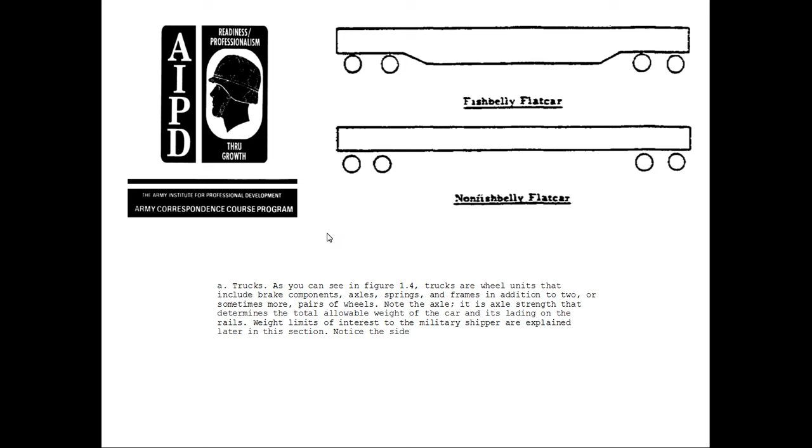Note that the axle strength determines the total allowable weight of the flat car and lading on the rails. Weight limits are of interest to military shippers, and are explained later in this section.

Notice on the side: the truck, the deck, the underframe, the brake wheel, stake pockets, body bolster, and underframe. The trucks include brake components, the axle, spring, frames, in addition to two or sometimes more pairs of wheels.

Notice the axle; its strength determines the total allowable weight of the car and lading on the rails. Weight limits are of interest to military shippers, explained later in this section. Figure 1-1 shows a typical flat car, Figure 1-2 a flat car disassembled, and Figure 1-3 a typical truck bearing and bolster.

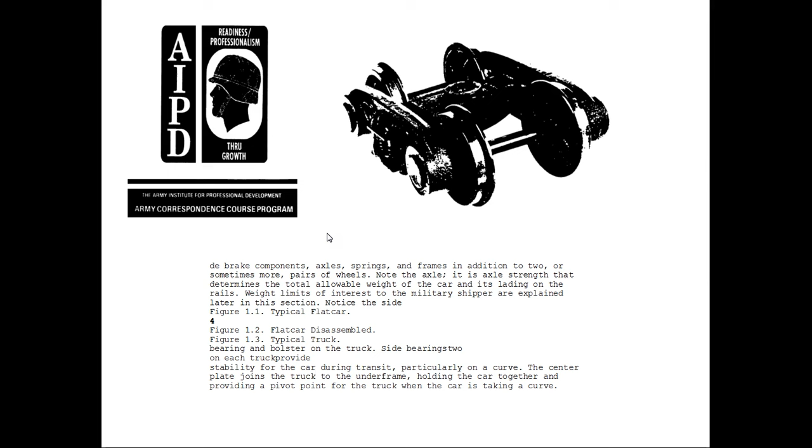The underframe. The framework of the underframe is shown in Figure 1-2. It is the foundation of the flat car, receiving buffing and pulling stress, and carries the weight of the deck and lading.

Stake pockets are attached to the side sills to support stakes and temporary sides above the deck. The transverse member at each end, called the body bolster, contains a projection that fits into the center, shown in Figure 1-4.

Going from the top, 12 o'clock clockwise: side bearing, axle, center plate, brake lever, brake hanger, brake shoe, wheel, rail, brake beam, brake pin, bottom connecting rod, journal, side frame, spring plank, coil spring, and bolster.

In the bottom picture of the underframe, from 12 o'clock clockwise: center sill, cross bearer, body bolster, side bearings, draft gear pocket, end sill, diagonal braces, stringer support, side sills, and stake pocket.

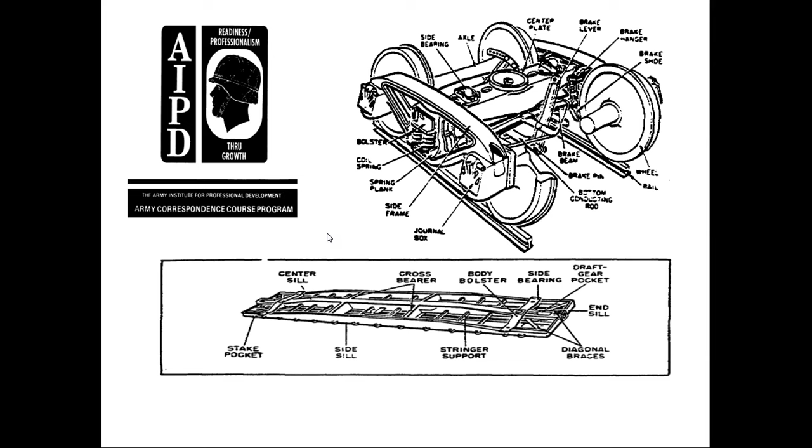C. The deck: the platform flat car load rests on the deck, normally constructed of tongue and groove wood plank for a solid fit. The deck is secured to the underframe. Figures 1-1 and 1-2 illustrate the deck clearly.

D. The brake wheel, located on one end of each car, is the brake wheel that operates the handbrake.

Although the typical flat car in Figure 1-1 shows the brake wheel under the side of the deck, the more common position is upright, as sketched, extending above the level of the deck. The brake wheel is used to secure and hold the car when parked, keeping it from moving.

In some yard or road operations, the handbrake is used to slow down and stop the car when it is in motion. The brake wheel can be lowered or removed to make loading the flat car easier. A loading rule specifically requires clearance around the brake wheel to ensure it remains accessible at all times. More about clearance is given with the car load rules, discussed in Section 2.

1-4, the truck center. Since loading rules are expressed in terms of the location of the truck center, it is important to understand what this term means: simply, the truck center is the center of the truck, regardless of the number of wheels. How to find the center is discussed in the following subparagraphs.

For a four-wheel truck, the center of the bolster is the center of the truck. A chalk mark placed on the side directly above that point will help you find the spot on the loading flat car. The sketch shows how to mark the center of the four-wheel truck.

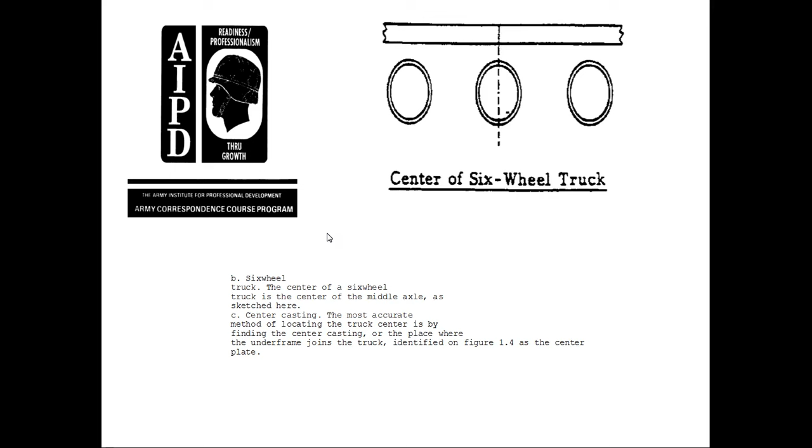For a six-wheel truck, the center is the center of the middle axle, as shown in the sketch here. The center casting method accurately locates the truck center by finding the center casting, the point where the underframe joins the truck, identified in Figure 1-4 as the center plate.

1-5, weight limits. Although there is no standard dimension for commercial cars, the described flat cars are commonly used on railroads in the United States. The Official Railway Equipment Register should be consulted for the description of specific cars to be used.

Information stenciled on flat cars gives the military shipper three essential data items about the car: capacity, load limit, and light weight.

Capacity is given in short tons, and platform dimensions in feet, approximately. A 40 short-ton car has a length of 40 feet with a 9-foot width. A 50 short-ton car has a length of 45 feet with a 9-foot width.

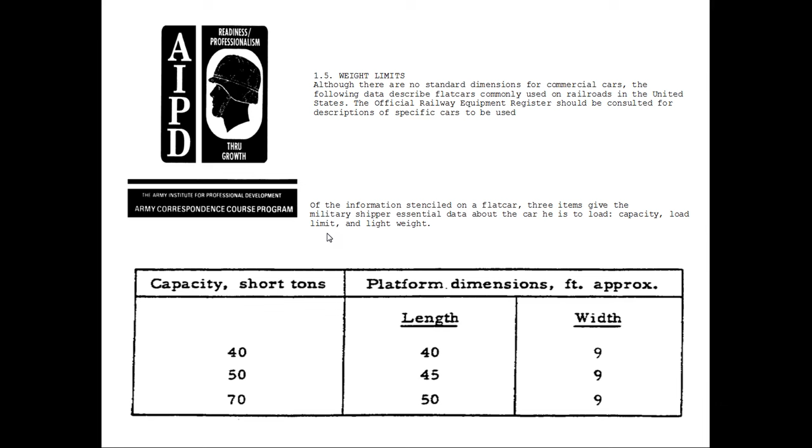They're all 40, 50, and 70 tons, 9 feet wide. The 70 ton is 50 foot in length approximately.

Capacity: suppose your car is marked at a capacity of 100,000 pounds. What does that mean to you? Simply, this is the capacity marking on the car, the basis of the tonnage class. Capacity in this instance, nominal, is expressed in multiple units of 1,000 pounds based on the weight of the car itself and total allowable weight of the car and load.

Capacity 100,000 means that the car is a 50-ton class. Capacity does not tell you how heavy your load can be, any more than the nominal rating of a 5-ton truck means a 10,000 pound limit on the payload. As you may know, a so-called 5-ton truck can carry more than 5 tons on the highway.

Load limit: the abbreviation load limit, LD LMT, with a number after it expressed, is the maximum load the car is designed to carry without endangering the car or load.

The notation LD LMT 118,600 pounds on a flat car means the car can carry a load up to 118,600 pounds. The load limit plus the weight of the car, described in subparagraph 1.5c as the lightweight, equals the total allowable weight on the rails mentioned in paragraph 1.3, dependent on axle strength.

C. Light weight: the abbreviation lightweight, LTWT, with a number of pounds, refers to the weight of the car itself. The lightweight is measured without a load, clean, standing still on the scales, and uncoupled at each end.

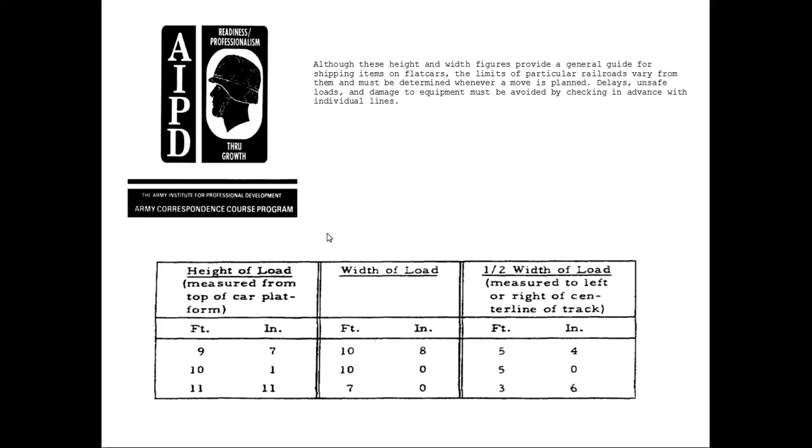At a height of 10 foot 1 inch, the load can carry a width of 10 foot, where half the width of the load is 5 foot. At a height of 11 foot 11 inches, the width load is 7 feet, where the half width load, measured from the centerline of the track, is 3 foot 6 inches.

1.7, vehicle carrying capacity. Note that we're trying to answer how many 5-ton trucks can fit on a flat car. Basically, that's what you must know: dimensions and weight of the 5-ton cargo truck, including any cargo, the length and width of the flat car deck, and the load limit of the flat car. Note that all 5-ton cargo trucks are also modeled differently in size, weight, and dimension.

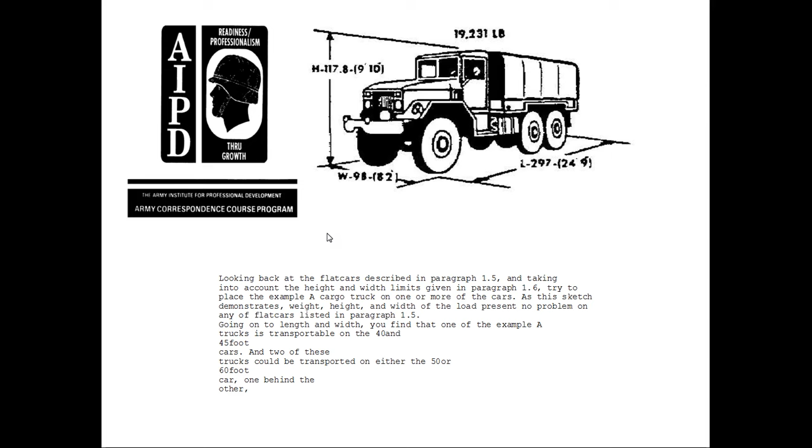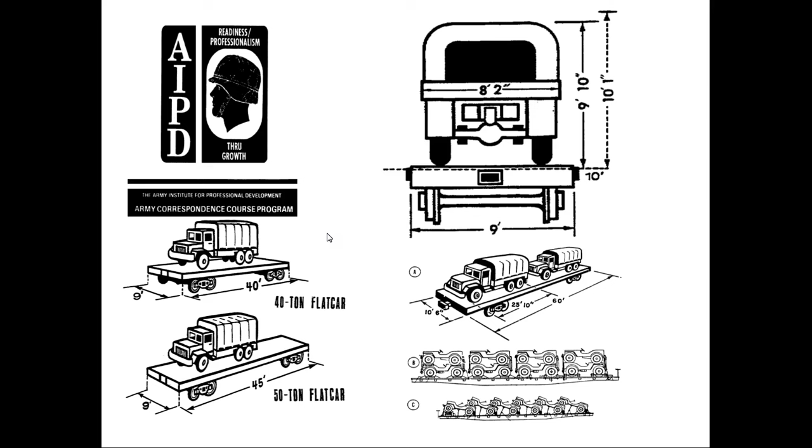You see the 40-foot long 40-ton flat car with one truck on it, and a 45-foot 50-ton flat car with a truck on it. In A, you see two trucks on a 60-foot long flat car with a 10-foot 6 span. You see two cargo trucks. In B, you see examples of Jeeps stacked up on top, the little Jeep Wranglers in B and C.

1.8 summary. Flat cars are generally found in fish belly and non-fish belly design. The flat car has three basic components: trucks, underframe, and platform or deck. Trucks have two or more pairs of wheels that ride on the rails, brake elements, axles, and centered on the top of each truck, a center plate casting that provides a receptacle for complementary fitting of the underframe and trucks. The underframe is the skeleton to which the deck is attached; it takes the buffing and pulling stress applied to the flat car and bears the weight of the platform load. The deck is primarily made of wood planking.

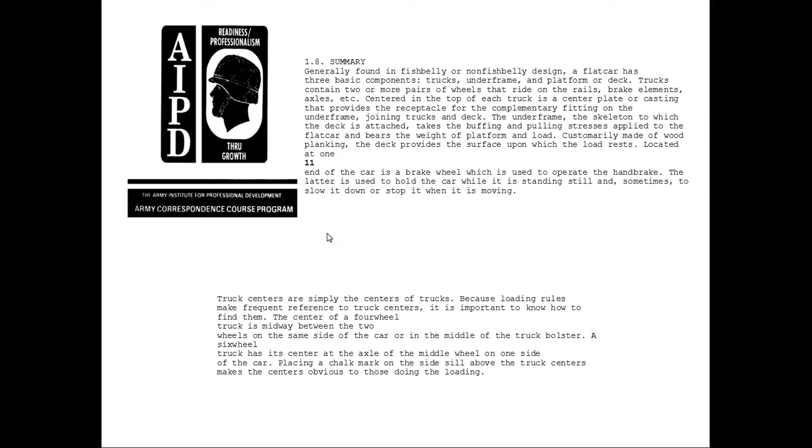The deck provides the surface upon which the load rests. Located at one end of the car is the brake wheel, which operates the hand brakes. The latter is used to hold the car while it's standing still, and sometimes to slow and stop it when it's moving. Truck centers are simply the center of the truck; because the loading rules frequently reference them, it is important to know how to find them. The center of a four-wheel truck is midway between the two wheels at the side of the car, the middle of the truck bolster. On a six-wheel truck, the center axle is the mid-wheel on one side of the car. Placing a chalk mark on the side sill above the truck center makes the center obvious to those doing the loading.

Commercial flat cars do not have standard dimensions; they vary from one car to another. Still, flat cars commonly used in the United States are in the 40, 50, and 70-ton class, with capacities ranging from 40 to 60 feet long, all approximately 9 feet wide. These items are stenciled on the side of the flat car, of particular value to the shipper: capacity, load limit, and light weight.

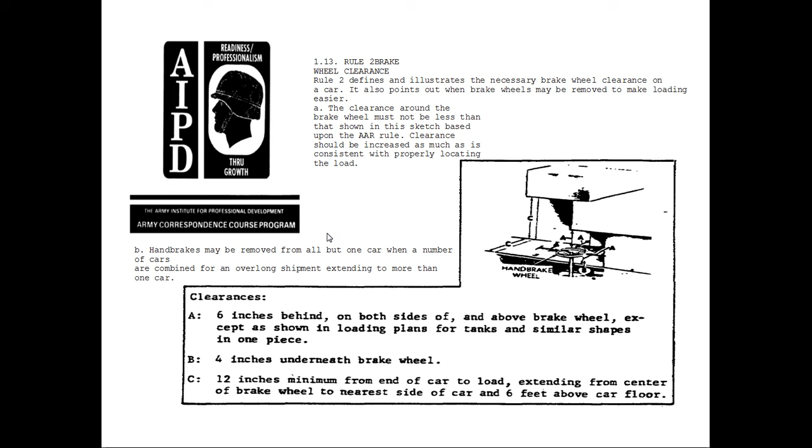The clearance should be: A, 6 inches behind and on both sides of the brake wheel, except as shown in the loading plans for tanks and similar shapes in one piece. B, 4 inches underneath the brake wheel, and 12 inches minimum from the end of the car to the center of the brake wheel, nearest to the side of the car, and 6 feet above the car floor.

1.14. Rule 4, Maximum Load Weight in Single Cars. The weight of the load in the car must not exceed the load limit stenciled on the car. The weight of material loaded between the truck centers and the ends of the car must not exceed 30% of the stenciled load limit, 15% at each end. For example, with a stenciled car load limit of 104,000 pounds, you may load 15,600 pounds at each end of the flatcar. This means between the truck center and the end of the car, when the load length is less than the distance between truck centers.

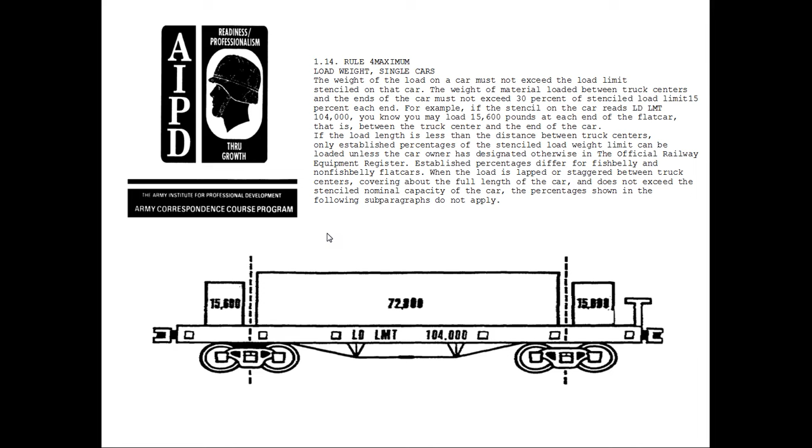The established percentage of stenciled load weight applies unless the car owner designates otherwise in the Official Railway Equipment Register, with different percentages for fish belly and non-fish belly flatcars. When loads are staggered between the truck centers, covering the full length of the car, and do not exceed the stenciled nominal capacity of the car, the percentages shown in the following subparagraphs do not apply. 72,000 pounds, and 15,600 on the end at the center sills. Fish belly: a fish belly design gives a greater carrying capability than a non-fish belly. Loads of 18 feet or less between the truck centers can equal 75% of the stenciled limit.

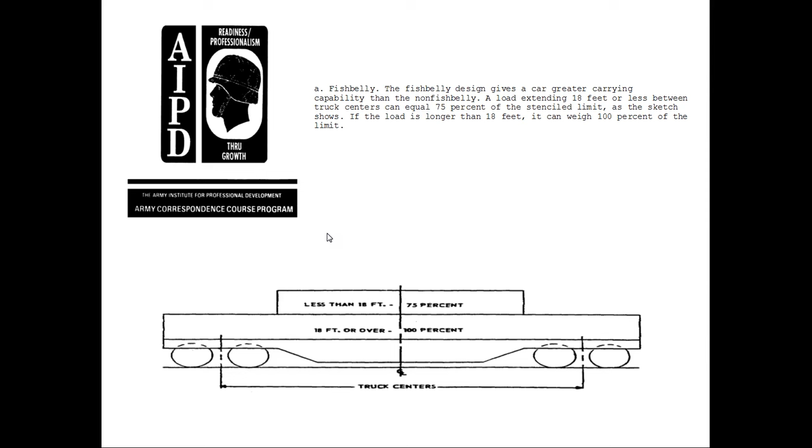As the sketch shows, if the load is longer than 18 feet, then it will be 100%. Less than 18 feet is 75%. 18 feet or over, 100% between truck centers. Non-fish belly: percentages for non-fish belly centers are lower than the fish belly.

Lengthwise, the load can equal 66% of the stencil load limit for a load measuring 10 to 24 feet, 75%; over 24 feet, still located between the truck centers, 90% of the load limit; extending beyond the truck centers, a weight of 100% of the load limit.

1.15. Rule 4e, center of gravity. Although not a separate rule, 4E emphasizes that because of the significance to the shipper, the center of gravity figures importantly in the load carrying, regardless of design. The problem is to balance out the load in the car, lining up the center of gravity of the load and the center of the car as closely as possible.

Perhaps you think that some military equipment cannot be balanced in the center of the flat car, for example, a crane with a boom. To ensure loads are properly balanced in the car, the AAR established rules for loading items not centered on the car whose length is less than the distance between the truck centers.

The diagram on the next page shows the location of the CG in relationship to the ratio of load weight to load limit. For example, if the load weight is 75% of the stencil load limit, the CG must not be placed closer to the truck center than 1/3 of the distance between the truck centers. Again, if the shipment weighs 87% of the load limit, the center of gravity could be situated anywhere in the middle 1/7 of the deck between the truck centers.

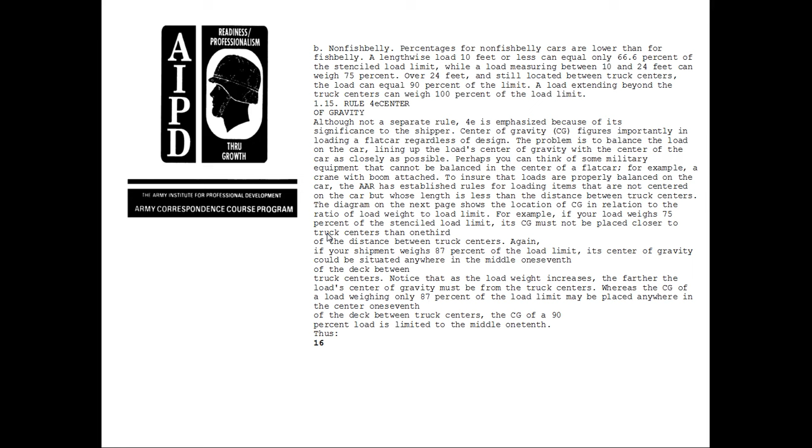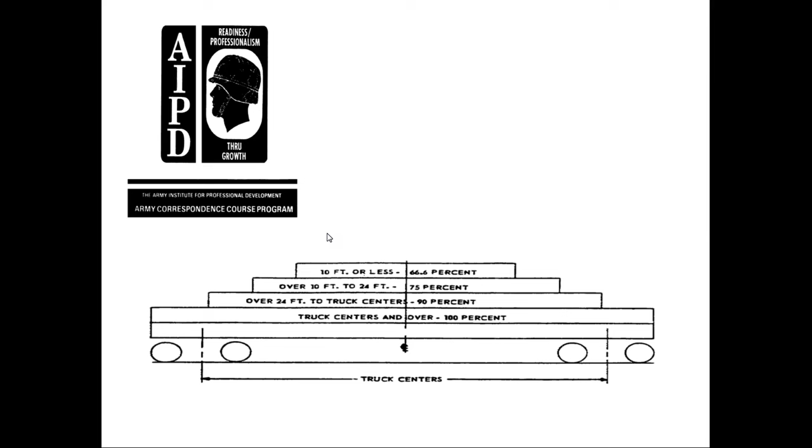Notice that as the load weight increases, the center of gravity must be farther from the truck center. The center of gravity of a load weighing 87% of the load limit may be placed anywhere in the center 1/7 of the deck between the truck centers. At 90% of the load limit, the center of gravity must be in the middle 1/10. Thus, starting at the bottom: over 24 feet from the center, 90%; over 10 to 24 feet, 75%; and 66% at 10 feet or less from the truck center.

And now I'm going to take a break, guys. We'll come back. Hello. Hello.

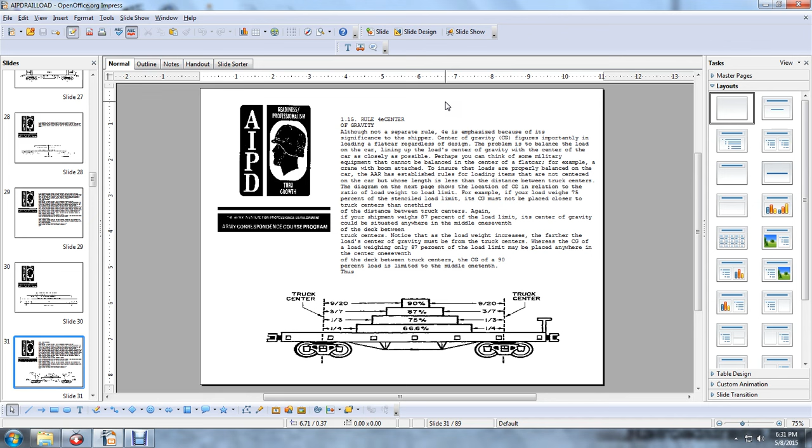Alright, 115, center of gravity. Although not a separate rule, it emphasizes that because of the significance to the shipper, the center of gravity figures importantly in the loading of the flat car, regardless of design. The problem is to balance the car, lining up the center of gravity and the center of the car as closely as possible. Perhaps you may think some of the equipment cannot be balanced in the center of the flat car, for example, a crane with a boom.

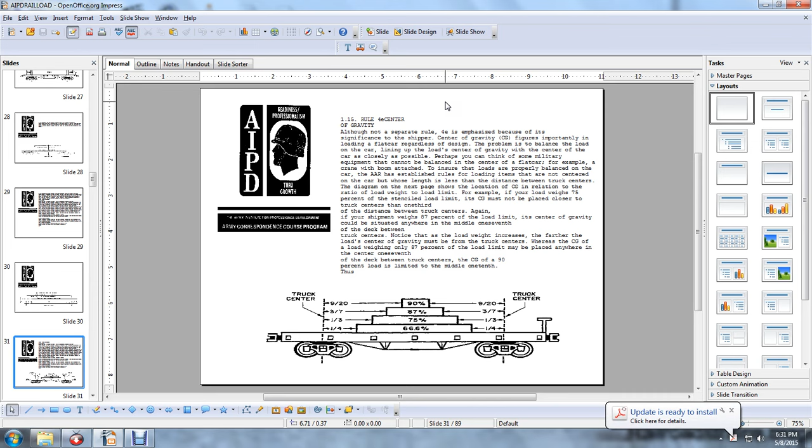To ensure the loads are balanced on the car, the AAR established rules for loading items that are not centered on the car, whose length is less than the distance between the truck centers. The diagram on the next page shows the center of gravity and its relationship to the ratio of load weight to load limit. For example, load weight 75% of the stencil load limit.

If your shipment weighs 87% of the load limit, its center of gravity could be situated anywhere in the middle 1/7 of the deck between the truck centers. Notice that as the load weight increases, the center of gravity must be farther from the truck center. A load weighing 87% of the load limit may be placed anywhere in the center 1/7 of the deck between the truck centers, and at 90% of the load limit, in the center 1/10.

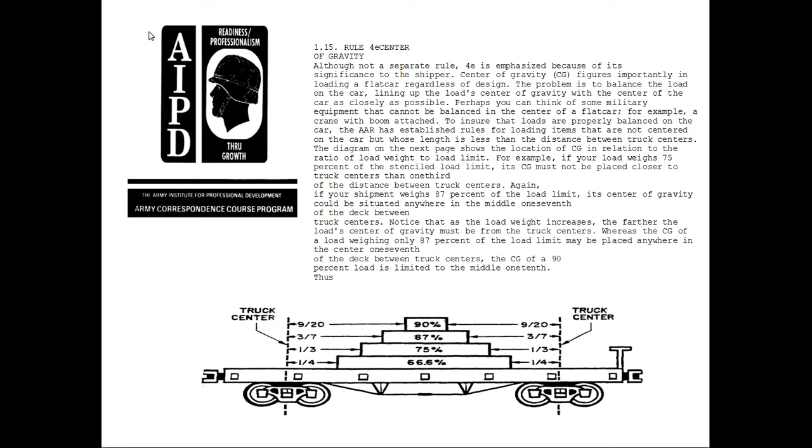Nine twentieths plus 9/20ths equals 18/20ths. 20/20ths minus 18/20ths equals 2/20ths, or 1/10. Note that the sketch below illustrates the crane and how the boom might be loaded.

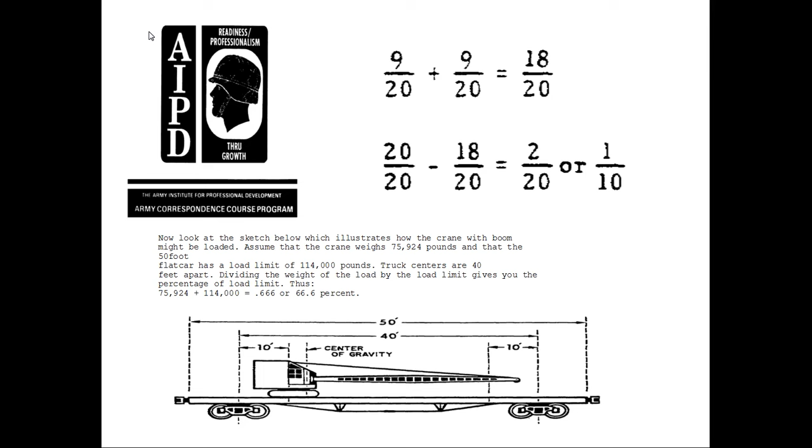Assume that the crane weighs 75,924 pounds, and the 50-foot flat car has a load limit of 114,000 pounds with truck centers 40 feet apart. Dividing the weight by the load limit gives you the percentage of load limit: 75,924 divided by 114,000 equals 0.666, or 66.6%. As you now know from the previous diagram, with the center of gravity at 66.6%, loads must not be closer to either truck center than 1/4 of the distance.

Between the truck centers, for example, 1/4 of the 40 feet of distance between the truck centers is 10 feet. Is the sketch properly located? Yes, the center of gravity is more than 10 feet from either truck center.

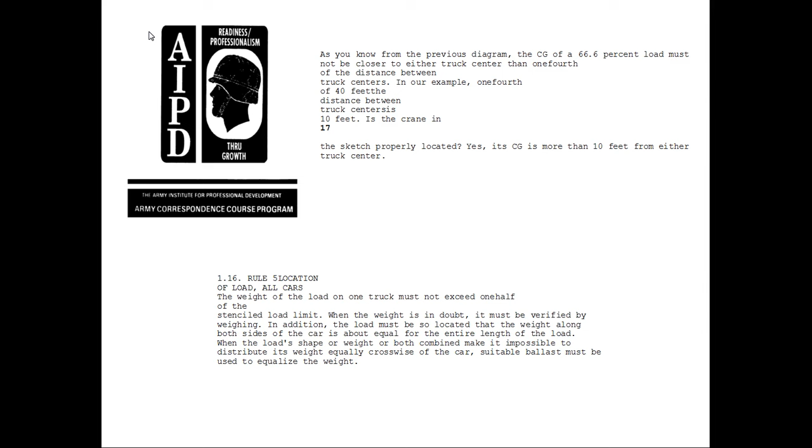116, rule number 5, location of the load on all cars. The weight of the load on one truck must not exceed 1/2 the stenciled load. If the weight is in doubt, it must be verified by weighing. The load must be located so the weight along both sides of the car is about equal for the entire length of the load. When the load's shape and weight combined make it impossible to distribute equally crosswise of the car, suitable ballast must be used to equalize the weight.

117. The AAR rules for DoD material. As mentioned in paragraph 111, section 6 of the AAR rules governs loading commodities on open top cars, specifically how the material will be loaded on the car. Section 6 drawings illustrate how individual items are to be secured on the car. Drawings cover particular equipment in several categories, such as artillery, boats, containers, and vehicles. Among vehicles are 1/4 ton trucks, 1.5 ton trailers, tanks, and similar vehicles under 60,000 pounds.

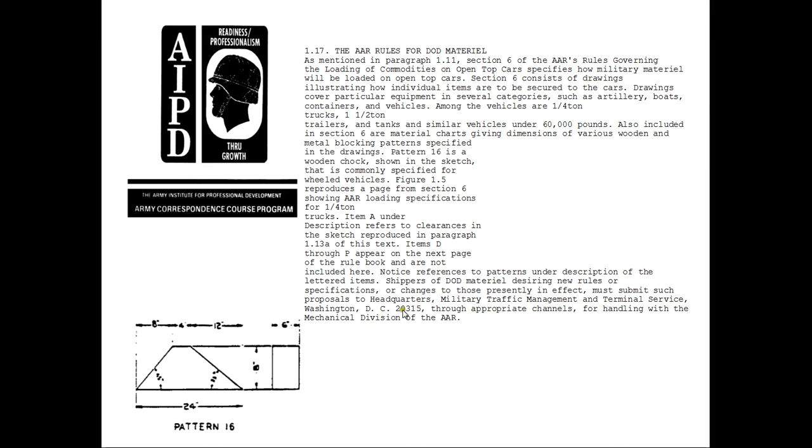They also include sections with a material chart giving dimensions of various wood and metal blocking patterns, specifically pattern 16 and wooden chock shown in sketches and commonly specified for wheeled vehicles. Of the AAR.

From the foregoing, you can see the military works closely with the AAR. Nothing may be shipped over the commercial rail at less than the strength called for by the rules. The Army requirements depend on and meet the minimum standards of the AAR.

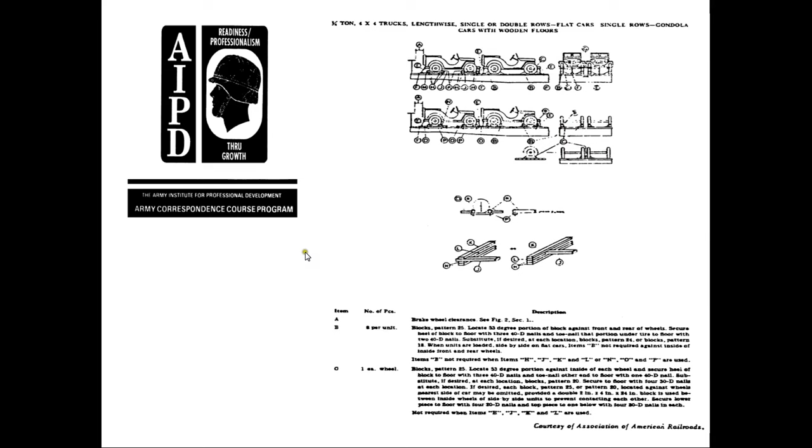Field manuals. Among field manuals treating the subject of loading rail cars is FM 101-10, Staff Officers Field Manual, Organizational, Technical, and Logistical Data, used in planning rail movements, giving the characteristics of foreign rail stock, unpowered railway cars, data on moving divisions, what kinds of cars are needed, and vehicle loading tables. Field Manual 55-15, Transportation Reference Data, also contains a great deal of railroad loading information tabulated for use in planning.

Other TMs contain information on the transportability of particular pieces of equipment. One example is TM 55-2330-207-20, transportability guidance for semi-trailer, stake, 12-ton, M127A1C and M127A2C, including significant transportation safety guidance for moving the semi-trailer by various modes of transportation, as well as evaluation, drawings, characteristics, precautions to be observed in shipping semi-trailers by rail, blocking and restraints, and detailed diagrams of wheel tie-downs. Here's the tie-downs and the cleats for the truck.

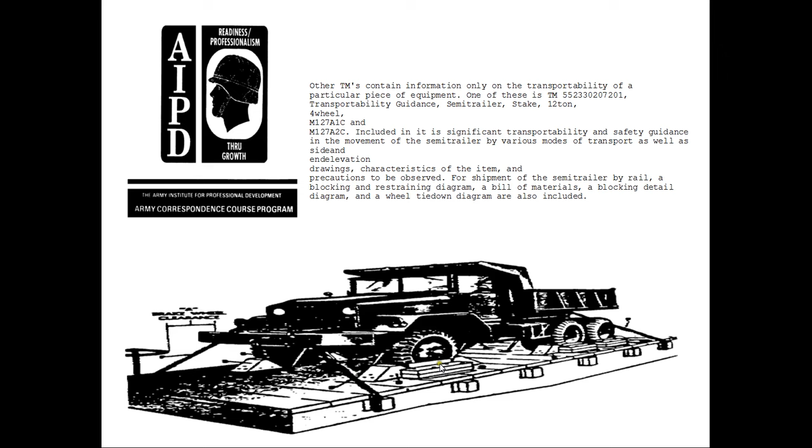Technical Manual 55-601, Railcar Loading Procedures, especially valuable to transportation, offers guidance in an appendix of loading rules, including patterns and diagrams for securing the more common to the not so common vehicles on the railway car, a detailed description of tie-down materials needed, and photographs that illustrate certain methods. Figure 6-8 and the instructions accompanying TM 55-601 are reproduced.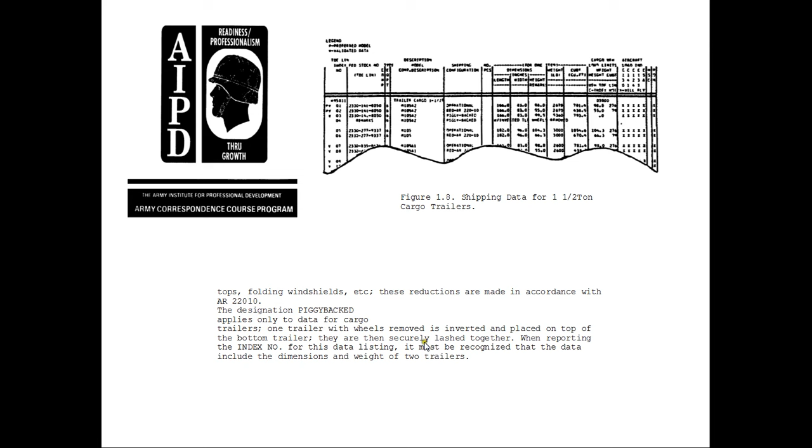D. The load drawings in paragraph... Among the many new items developed in the Army, shipping specifications must be established for missiles and support equipment. For example, for the XM48 Chaparral full-tracked self-propelled missile, the agency responsible for specifying loading is the U.S. Army Materiel Command, whose Savanna Army Depot prepares appropriate drawings with loading and bracing diagrams.